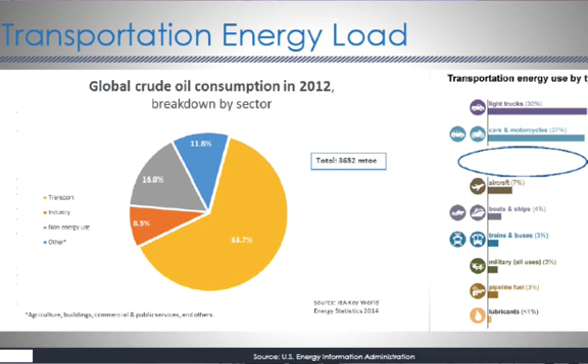To get at light-duty vehicles, we need to deploy a lot of expensive stations globally. The US pathway has been to focus on high fuel use applications where you don't need as many stations - the investment is lower. Trucks, with a much lower population but much higher fuel use, are a very good target, and that's what I'll spend some time talking about.

Fleets are obviously our target globally. At Westport, we have a joint venture with Cummins Engine Company globally, and in China a joint venture called Weichai Westport. So we have a global footprint, but what we find common among these fleets globally is this is a really challenging change for them to make.

There are different engine technologies, and I'm going to take you through that in a moment to explain what those technologies do. Fleets need to decide what kind of fuel they're going to use. CNG is very popular on this side of the Atlantic, while LNG is probably more popular in Asia and Europe, or will be. Then there's this emerging application for RNG, or renewable natural gas, and I'll talk about that and give you a feel for how we think it's going to impact the marketplace.

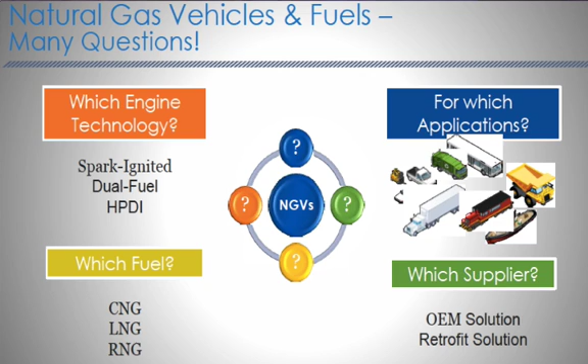Fleets need to decide what application they're going to target first - there are a lot of different options, as you can see in the top right: light duty into garbage trucks, transit buses which are very popular over here and in Europe and growing in South America and Asia. And we're still working on that high horsepower sector - mine trucks, rail, marine, light marine and heavy marine. I'll talk a little more about that.

And then, how are you going to start this process? Are you going to take an existing vehicle and convert it, or buy a new vehicle from an OEM, an original equipment manufacturer? So there's a lot of decisions fleets have to make - this is not an easy process.

Over top of all that, this value proposition we have keeps changing. So we've got that slide I just showed you and all the complexity with that, and we also have to deal with: why should somebody make this change?

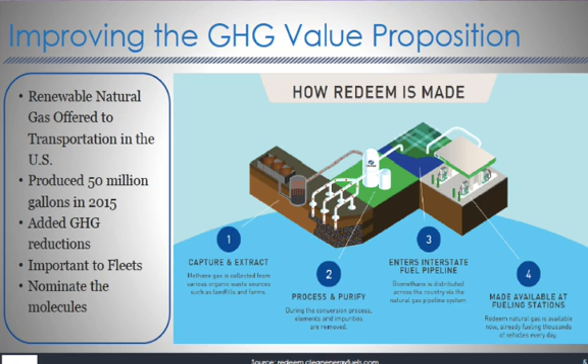As I said, I'm going to have to talk a little bit about the technology here because the technologies do different things, and I think it's important you understand them. So bear with me here. A bit of an internal combustion engine seminar coming up on the two basic internal combustion engine platforms.

First on the left, diesel cycle or compression ignition, or diesel engine. What these systems do is actually compress air until it's so hot that when diesel is injected under really high pressure, it ignites. It's a very efficient engine. That's why you see it in virtually all the heavy-duty trucks and high horsepower applications globally. Very fuel efficient, very performance-based.

On the right, you see what's called the Otto cycle or spark-ignited system. What it does is compress air a little bit, but then it has air and fuel mixed together and uses a spark plug to ignite it. The main difference between these two is probably the fuel economy benefit you see in the compression ignition or diesel cycle. Otto cycle is a simpler engine, and you get some performance speed benefits out of it. But generally, you would see a fuel economy difference, and in fleets burning a lot of fuel, that's very important.

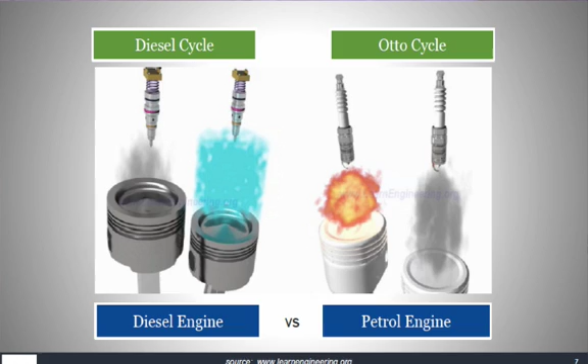So that's high-level internal combustion engines. Let's talk about natural gas engine technologies. There's a lot on this slide, but let me just start on the left. If you look at the bottom left, you'll see we start with light-duty vehicles, and then we go up in weight classes. Medium-duty, heavy-duty vehicles, so that would be an over-the-road tractor, trailer, truck, off-highway locomotives, sort of the beginning of high horsepower, and then large marine. And what you'll notice is that the fuel choice starts to shift. Light-duty virtually everywhere is CNG today. But as you move up in weight class, you start seeing a shift from CNG to LNG.

The problem we have in the US is we started with CNG in the light and medium duty space, so CNG is basically the dominant fuel in the US. We'll talk about other countries in a minute. But as you get into higher horsepower applications, you have to shift to LNG.

You just don't have enough space on the vehicle to deal with CNG tanks. On the right, the technology choices. The bottom right, spark ignited, that was the Otto cycle I talked about a moment ago. Today in the US, in trucking and busing, that is by far the number one application. Probably in Europe too, and in China this is a growing segment, where you'd see spark ignited engines in diesel type platforms.

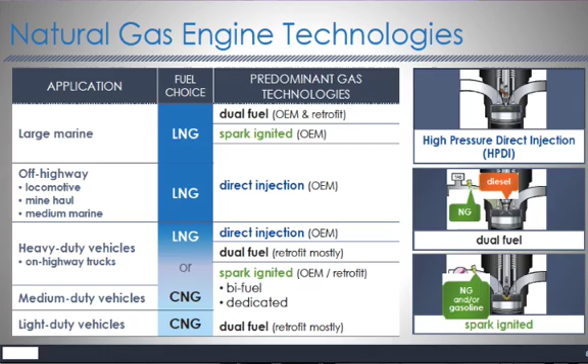On the top, high pressure direct injection - it's my company's proprietary technology. It's going to be launched in Europe first. We actually had some product in the US, discontinued it - it was almost a retrofit type of system, done in partnership with Cummins. We are launching with a couple of European OEMs, and I'll walk you through that technology in a moment, but it gives you diesel-like fuel economy, diesel-like performance with natural gas as a fuel, and it's an LNG-based system.

As I said, these technologies do different things. At a high level, a very simplistic view: the spark-ignited systems get you great reduction in oxides of nitrogen, or NOx. The high-pressure direct injection system gets you benefits from a carbon perspective, or greenhouse gas perspective. So you end up with different choices, adding to the complexity that we're giving these fleets.

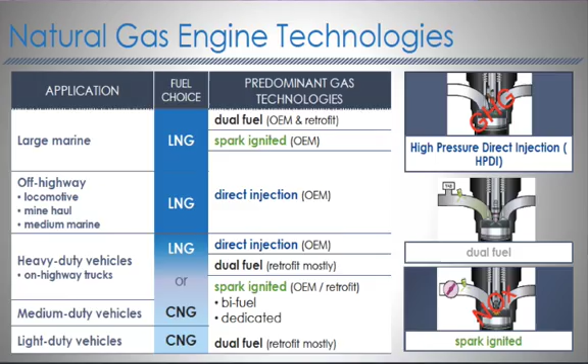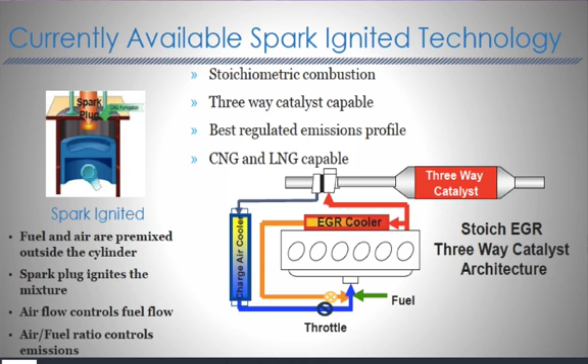Spark-ignited - this is a schematic of what that system looks like. Both our systems here and in China look very similar to this. The key to this technology is the same thing that's been in the light-duty space for about 30 years - it's a catalytic converter, or three-way catalyst. This system allows us to get rid of very expensive, labor-intensive diesel after treatment and replace it with something you're all familiar with. You just don't have to worry about it. It's a very reliable system. Catalytic converters are highly effective at managing NOx, and I'm going to show you an example of that.

It's hard to read from here, but I think it's a 1985 bus, and the NOx line is what I'm going to focus on - it's got 10 grams per brake horsepower hour. That's the measure, you don't need to know what that means, but that's what it is. That was in 1985, one bus. In 2010, EPA required all engines sold in the US to be 0.2 grams. Europe had a very similar measure just a couple years later. What that translates to is 50 buses were the equivalent of one 1985 bus.

With this technology we have in North America, we knew we could use that catalytic converter to drive that number down further. We've asked California and the EPA for an optional low NOx number, and that's what you're seeing here - it's 0.02, so 1/10 of the standard required today. It's optional, and if you use one of our new engines, you can get the equivalent of 500 buses compared to one 1985 bus. But in the process of developing this, we actually came in at half that - 0.01.

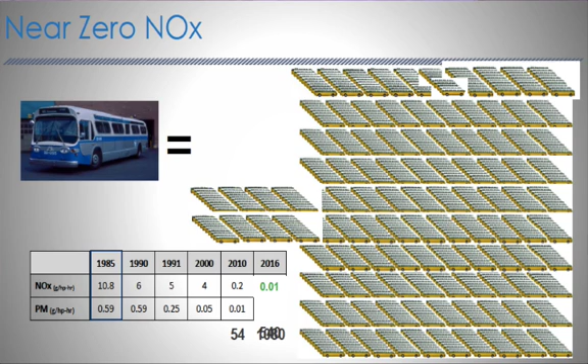So you can see it's just a staggering difference over the years. What's important here is that 0.01, depending on who you talk to and what state or country you're in, from a NOx perspective, that's very close to what an electric vehicle would generate using upstream emissions captured. There's calculations using RNG, a low carbon fuel, and this technology that say you're as clean as an electric vehicle, which is really something because electrics are challenged in this space today, and I'll show you more about that in a moment.

So that was spark ignited, very effective at NOx reduction, mostly in urban application. Where we're most active there on the planet is in Southern California because they have a huge NOx issue there, but it's any major city with that clouded pollution that's trying to deal with NOx.

HPDI, this direct injection technology, so again, this one's shifting gears and more carbon focused. It's usually in larger horsepower applications. In that first scenario, we build the engine, we ship the engine to an OEM, they put it in their vehicle. In this situation, we work with the OEM, use their engine, and it's fully integrated on their assembly line.

The two core technologies here on the left, you'll see HPDI injectors. What we do here, a diesel injector under high pressure injects that diesel fuel into that combustion chamber. We have two ports, so we inject a drop of diesel and then natural gas under high pressure. That drop of diesel ignites with that pressurized air, and that then ignites the natural gas.

A driver in this vehicle would be challenged to feel and notice the difference between this vehicle and a diesel vehicle, which is really important to them. Performance, fuel economy, everything will feel and seem the same.

So as I said, launching in Europe first, we will expect to see it over here on this side of the Atlantic and in Asia. We're working with our joint venture partner there to launch this technology as well. But again, different target—it's a carbon-focused application.

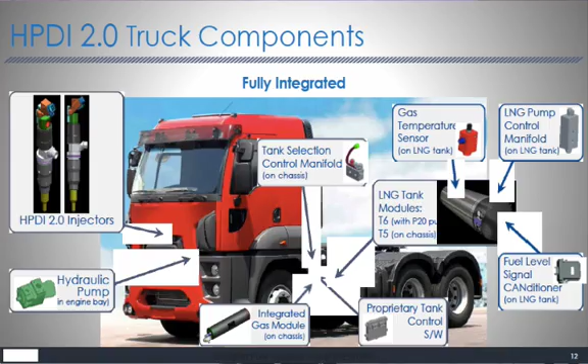I thought I'd just put this quote in here. You wouldn't know, I doubt you know these folks, AVL, but they're the largest private engine integration engineering company in the world. They work with every global OEM and have a lot of influence, and you can read that first line there.

The global regulators are continuing to challenge OEMs on fuel economy, which translates right into carbon. So as you improve your fuel economy, you lower your carbon footprint, and the diesel OEMs are going to be really challenged with the next set of regulations coming here first, but we think they'll be in Europe very soon. And AVL thinks this is the solution, which is an LNG-powered truck and other applications.

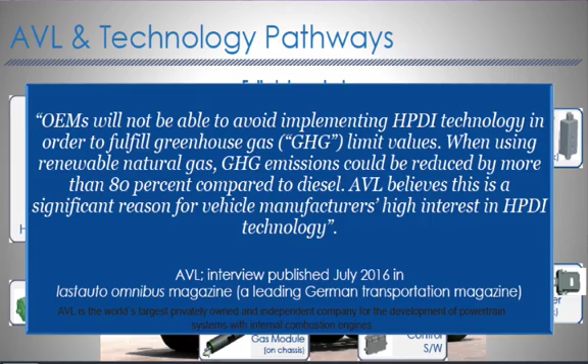Staying on this carbon benefit discussion, I know this is a very hard slide to read, but I'll talk you through it. California is very focused on this NOx reduction in Southern California, but they're also looking at fuel diversity. I would say they're leading the world in this effort. And what they've done is created something called the Low Carbon Fuel Standard.

So on the left, you'll see that first blue bar is actually diesel. I won't get into what the measure is—it's carbon intensity in a measure of fuel. And I believe that's 102 or 107. I can't see it from here, but that's baseline. And then we drop down from there.

So then you have LNG delivered to a vehicle. CNG, they say, is lower, and this is looking downstream, upstream, the full life cycle of a fuel. They get into hydrogen and some other options in that center box, but what's interesting is that far right box gets into renewable natural gas. The first, sort of four in from the right, is landfill gas converted to methane to run in vehicles or burn in these natural gas engines. It has a carbon intensity that's quite attractive.

But as you go into the different feedstocks, you get into food waste, which is starting to get developed now in California, and you end up with negative numbers. There's a scenario in California where you're using the right feedstock and the right blend with LNG.

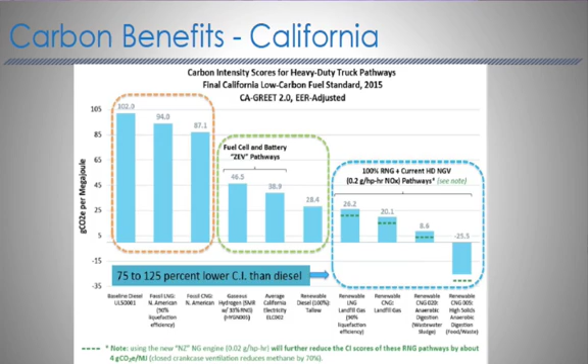So pipeline LNG blended with a renewable gas with a significant carbon benefit, you can end up with a negative carbon number in the fuel you're burning. What we think we're going to have to do is figure out some form of mix. The diesel folks used B20, 20% biodiesel, 80% diesel. We think it'll be something similar, maybe a B20 or B40 with biomethane mixed with LNG or CNG to improve the carbon footprint and leverage that value proposition. This is capturing a lot of interest in the US right now, and I think it's going to capture a lot of interest globally very quickly.

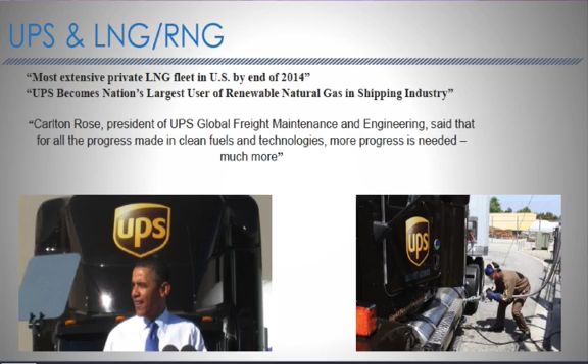I mentioned I was going to talk about one fleet. This is probably the largest truck fleet in the world - UPS, certainly in the US the largest truck fleet. They've been active in natural gas for a long time, and with LNG trucks they are the most active fleet in the US. They've just started to make the switch to RNG. I'm not sure what their percentage is - I'd guess 20 to 25% RNG mixed with the rest pipeline LNG. But they've been very successful with it, and they're by no means done. Their competitor FedEx has just opened the doors to this, and I think that's the pressure being put on them by UPS. I think we're going to see a cascade effect where all these large companies make this switch to leverage that value proposition.

Okay, that was a US view. I thought I'd take a moment to give you a sense of what's happening globally, and the best way to do that is to talk about the Paris talks, COP21, that happened earlier this year. Then I'm going to zero in on Canada, because we've had some discussions with the Canadian government about a big problem they've got, and I think this table summarizes it.

So Canada, this month, will be submitting their action plan. They need a carbon reduction of 30% by 2030. So what we did was peel the onion back on this and look at transportation - their action plan, at least from 3 months ago, was going to show a 5% reduction in transportation by 2030, which means they'll have to look to other sectors to find the support to manage this number.

We looked at passenger transport, mostly light-duty vehicles, and they're at minus 23%. Interesting - and we think electrics are probably going to help with that application, because electrics in lighter-duty passenger cars are doing the job today and will continue to do the job. At least that's our belief.

That last one, heavy-duty trucks - not only is it growing by 34%, its submission will be positive 17%. So it's going to have to be heavily supported by other sectors in the Canadian economy to get to that 30% reduction. Really, it suggests there is no solution in heavy-duty transport that the Canadian government has seen, which is why we stepped in with them.

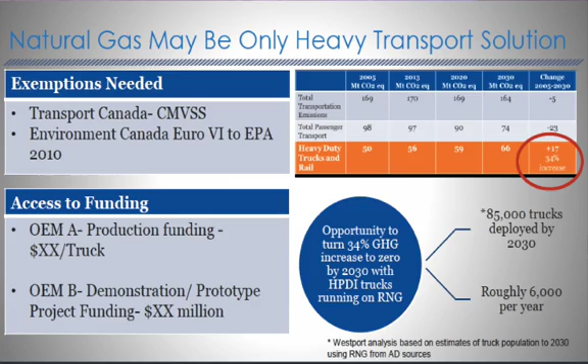So we showed them a scenario where using LNG combined with RNG, if they replace - I think it's 6,000 trucks per year starting next year - they turn that 34% increase into zero. They can flatline it, and depending on how aggressive they get, they can do different things. But it shows a solution the Canadian government could implement, and you can bet this is a problem everywhere, because there's just no solution in heavy transport when you're talking about carbon. Battery technology is going to be really challenged to get there.

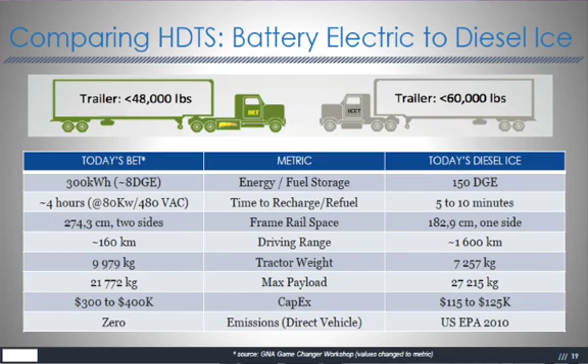So we don't see anything in the near future from a battery perspective that's going to make this change, and that's why we think LNG really is the fuel for the heavy-duty truck sector, and as you go up into high horsepower applications, we think LNG is important there as well.

Some of you are probably familiar with the ECAs, the marine ECAs, or emission control areas. They're driving major regulated change to shipping lines and vessels approaching shores, and we think, again, LNG is the fix for that challenge.

So in the US, one of the big issues is if you have an LNG truck, where do you go fuel it? You can certainly do LCNG, but we've got a big challenge here. I think where CNG has won from two perspectives so far.

All the trash trucks and transit buses, which is where the US market started, are all CNG based. And so there was a lot of stations built to support those.

LNG pricing was the other issue, and so it was very visible. Somebody's selling CNG and somebody's selling LNG, and the LNG was always priced higher. And if you're a truck driver or a fleet and you look at that, you just go buy the more expensive CNG vehicle because the fuel's less expensive. We're trying to work on that and make that shift.

Europe's doing a bit of a different approach. They've got what they're calling the LNG blue corridor, so north, south, east, west. You're going to be able to drive trucks across Europe, and the European Union will make sure there's stations available to fill those trucks. So Europe has looked at this segment and said it has to be LNG - it's the only thing that makes sense, especially when you look at space-limited European trucks.

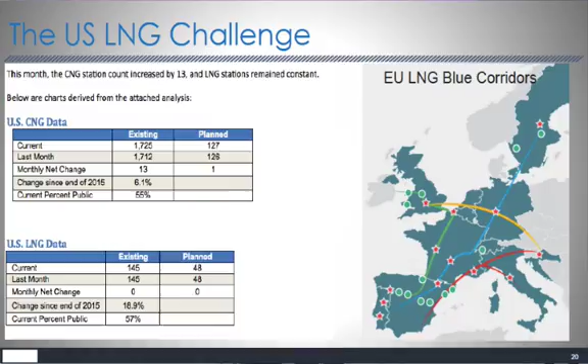So we think this will shift at some point. I think you folks could certainly be an important part of this discussion, but we need to see the U.S. starting to look at LNG more favorably to allow those heavy-duty trucks and other applications, high-horsepower applications, to dominate in this space.